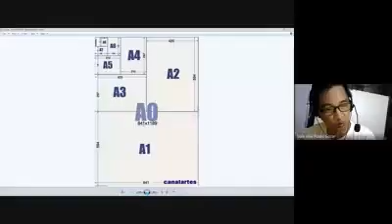Please confirm, can you see my screen? Wala pa po, sir. Nakita na po, sir. Dito na po. Meron na?

Yung A1, A0. These are the sizes of papers. No? Ano na siya? ISO na. When you say ISO, international standard na siya. Before, may mga letter size. What else? Letter size saka yung legal size. Now, yung letter size naging A4 na. Pero yung legal, nandiyan pa rin yung legal size. It's for legal purposes.

And in technical drawings, we have to use this one na. So, ang biggest size of paper, tracing paper, or technical paper is A0. This one usually is for malalaking drawings, yung mga site development plan, lalo na sa civil engineering. Usually, your drawings is ganitong size, A0. In architectural, we also use this size for big projects like mall, big development, mixed-use development. And sa site, when you have a big site, we need A0 size.

Kasi medyo mahal din na magpa-blueprint. Actually, same price din pala. Anyway, iniwasan namin yung maraming sheet of paper, mahirap yun eh. So, A0 is yung biggest size. Ang size niya is 841 by 1189.

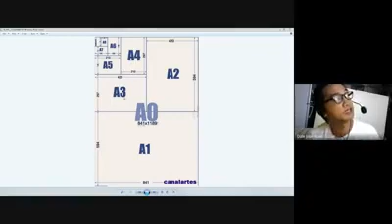Yung A0 is A1. Divide A1 into 2 papers, that will be A2. And divide A2 into 2 papers, that will be A3. And then yung usually we use is A4; 2 times of A4 is A3 na. Okay, guys? So ganun lang.

And then I'll show you yung Philippine building code. Kasi we're doing title block. What is the standard? Philippine standard for title blocks. Siyempre, we need to have a standard to follow. So it's indicated on the Philippine National Building Code. Luma-luma na to, hindi masyado na-update, but still, we have to follow this one.

Mataas yung screen ko eh. Sorry guys. Hirapan din ako. Okay, this is title block. Let's do number 4. Okay, where is the phone? Nandito naman pala. So, it's just the same.

Siyempre, ang gagawin natin today is A1 size lang. Kasi, ito yung normal size talaga for technical drawing. Special na itong A0.

I'll show you yung building code. Where is the building code? National Building Code. NBC. Makita. So wala dito.

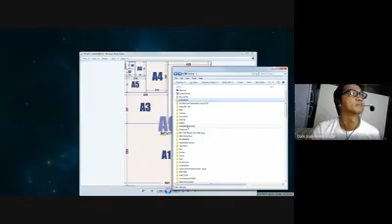Hindi ko makita yung Philippine Building Code. Where is that one? Philippine Building Code. Pasensya na guys, saglit lang ha. Hindi ko makita. Building code. Here, building code. Okay. Ang dami. Philippine Building Code. Ito.

Okay, this one, implementing rules and regulations. This building code, you can download in DPWH, yung latest copy sa DPWH. Just look for the title block, guys. I-upload ko to, or medyo malaki na, yung part ng title block lang, I will upload.

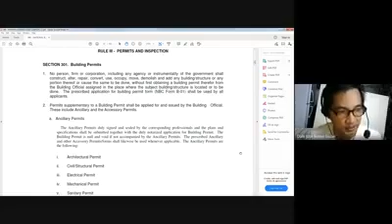So again, we need to have a title block on our drawings, to show your name, syempre, and the project name, location of project, the engineer or architect's name and yung license number niya, and then yung professional tax niya. What else? IAPOA number, and so on. And then yung owner, name ng owner, and then yung project name. Yung address of the owner and address of the project.

It's all indicated there. And then we need to show lahat ng disciplines involved. So if architectural, ang magsasign dito is, of course, architectural. Yung civil, guys, please do not sign on architectural ha. You are actually not allowed. Huwag nang makipagtalo kasi architectural is architectural. Civil is civil.

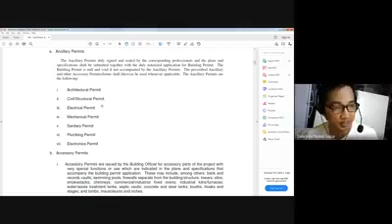Hanapin ko lang yung mga... this one is the title block. Okay, guys? So for the cover page, yung pinakaunang sheet. Say we are building a house or a building. So we need to show the perspective, the site development. This is architectural, no? And then location plan.

So again, ang title block, we will follow this standard, guys. These are the margins. Yung length of paper, depending on the size of paper that we will use. So say we will use 20 by 30 inches, or yung A1 size, we can use that one. But the margins, you should maintain. It is 45 mm or close to 2 inches. And then this here is 1 inch, yung right margin, or yung left side margin is 1.5 inch.

No, 1.5 inch. Then 25 sa right side margin, right hand side paper, 25, 1 inch. And then dito rin sa baba, bottom margin is 25. Can you follow, guys? Clear ba? So this is our activity for today, ano? And then we have 40 for the bar. No, title block. Okay.

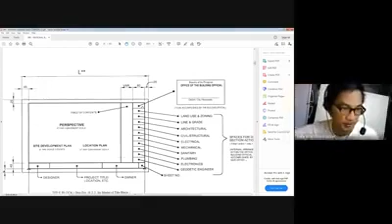And then here on the right side, we also need, this is example for a building project or housing project. Because syempre, there are so many disciplines involved in building project or architectural project. So we need the signature of the building officials sa City Hall, sa munisipyo. Siyempre, we need to get their approval.

One, yung first to sign is yung land use and zoning. So yung building official in charge sa land use and zoning, he will check the plans if may violations. If your building or housing project is not in the right zone. Say yung lot is hindi siya residential zone, commercial or industrial zone. Hindi ka pwede, you cannot build on that area.

Then also we need to check the line and grade. This is referring to geotechnical survey siguro to. Or sa lupa, civil works. Then architectural, building architectural yun City Hall, city architect. He needs to check yung drawings ng architectural.

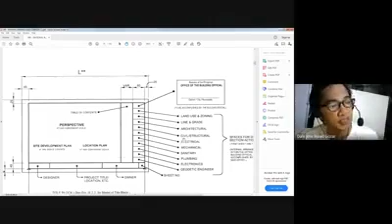And syempre meron din mga city engineers, yung civil structural, civil electrical. Hindi siya involved sa project but they will approve your project sa City Hall. These are the signatories. So you need to put a bar here. And of course, yung logo. Sa taas is yung Republic of the Philippines, Office of the Building Officials, and District, City, and Municipality. Say Quezon City or Manila.

Then here, sheet number. This one will vary depending on the project and depending on how many disciplines involved. Dito magbabago yung laman sa baba. This will vary. Example is yung kanina. Example is, hold on.

Okay, so this is my example again. This is yung sa project ko, my title block is usually like this. So this is my company. This is my architectural firm, yung logo ko. And then this is the engineer, owner. Actually, in this project, this is actually my boss in my office, Chiyoda, Philippines. So yung boss ko is the owner.

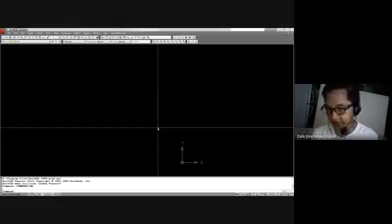Again, during our first meeting, I was able to discuss we have two spaces in AutoCAD, yung working space. Can you now see my AutoCAD, guys? Opo, sir. Okay, kapag ganito, yung default, anong space yun? Usually dito tayo nag-drawing. What is this space? You will have online exam, guys, maybe in midterm or finals. What is this? Kapag ganito ang logo, meron kang X and then meron kang Y.

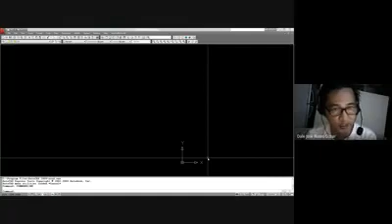Because we need to understand the flow of your work, the concept, since we are designing buildings, we need to know electrical. Actually we have a subject, half a semester, on electrical - we learn how to compute. Then in plumbing, one semester, there's a subject for plumbing. Then in structural, just rough calculations.

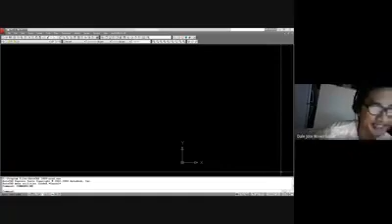Where do we put it? What's the opposite of model space, Ria? Trixie, sorry, Trixie - can somebody answer? Paper space po ba? Paper space. Very good, Roland. At least they're listening. Thank you, I appreciate it.

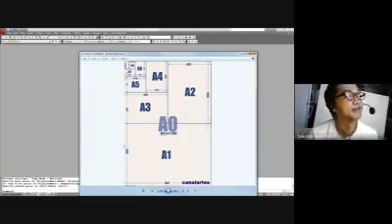Again, what is the size? Can somebody give me the size of A1 paper? Anybody can answer? 841 by 594. Yes, so this is yung X. Tama pagkakasabi niya, sino yun? Ako po, sir. Sino, si Trixie, attentive. Okay, very good Trixie. So again, para gawin to, what is the command?

What command do you use to do the rectangle, di ba, yung you gave me dimensions, ano, that is rectangular. So what is the command? Rectangle po. Rectangle, very good, tama po, sini-check lang kita, ha.

Ang starting point, again? 0,0. Correct po, 0, thank you. Okay, 0, tama siya. Pero again, and then what is the size? Yung other corner is how much? 841 by 594, thank you po.

Guys, tingnan niyo, yung actual size ng paper, yung default size ng paper sa AutoCAD ay maliit. Ito yung A1 size paper. Tanggalin ko muna itong butas, i-erase ko muna, hindi pa naman natin kailangan, different topic yan. Ito kasi yung zoom, yung plotting scale niya, kaya nandito lang siya. I-disregard niyo lang to, this is the paper size. Okay?

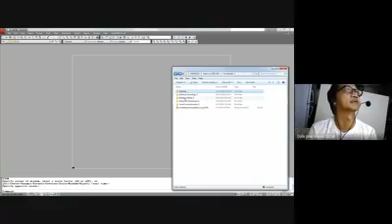What else? And then we check the title block, yung sizes. Building code, where is the building code? Nasaan building code ko? Sinarado ko ata, ito sinarado. Okay, again, this one, ano? Okay, so what is next? So meron na tayong 841 by

594, ano, this one, what is next? Anong command kaya? Siyempre guys, anong next step natin? Anong sa tingin niyo gagawin? Meron na tayo itong line na to, yung outer, sa paper meron na. So what is the next? Offset po. Offset, yes, offset by how much, tama ka, Maritoni. By how much? 45 po. 45, yung sa ano po? One side lang. Ay yun, ano po ba, one side. One side po, oo.

Okay sige, pero we need, yung rectangle kanina, we need to explode. May bagong command kasi iba-iba ang sukat ng margins, ano? Thank you Maritoni, galing. Just checking na sumusunod kayo, ha. Participate, guys, ha.

Okay, so this one, this one is a rectangle, no? So it's a P line, actually siya polyline siya, a rectangle is a polyline, ano, polygon, polygon siya, so usually ano siya, one entity siya. So you need to explode, yun ang command, explode. Tingnan mo to, lilist ko ha, isang entity to, one found, one entity or one object. So we need to explode yung rectangle, explode, select mo lang. So ngayon, four entities na siya, no, 4 lines.

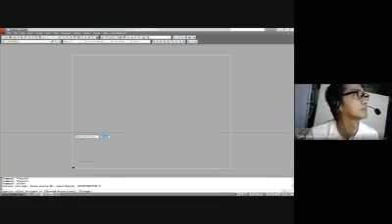No, this one. So now, tama si Maritoni, we can now offset. Ang command ano, offset. Offset by how much, Maritoni? 45, 1.5 inch. 45 mm. Ayun, tama si Maritoni. What else, Maritoni?

How much? Sir, di ko po kita yung screen po na isa, hindi makita. Yung AutoCAD ko? Hindi pa yung pag-base po, yung building code, hindi niyo makita. Opo. Okay, this one, 25. So, 25, so that is 25 na, no? Tama, 25, very good. So, 25.

So anong diperensya nito, guys? Dito, so meron mga extra lines, di ba? Paano mababawas yung extra lines? What command? You have to trim, tama, or pwedeng trim ano, you have 2 options. So trim, tama si, sinunod, Tisha? Tisha ba nagsabi? Tisha, okay, thank you Tisha. So trim, tama si Tisha. Trim, tama? And what else? Anong pang option natin?

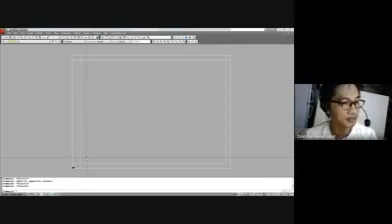Sir, si Trixie po yun. Trixie pala, Trixie? Sorry ha? Okay lang po. Okay, but yung mga guys hindi nagpa-participate, si Otelo lang, yung iba hindi.

Iba na talaga mga babae ngayon, no? Kahit sa Archie, guys, mga babae magagaling. Ba't kayo ganyan? Balik ka na mundo.

So this is fillet. Actually, I prefer fillet, it's faster. In the latest version of AutoCAD, they removed the selection options. It's automatic now, no need to select the border. So there's just a little adjustment from the old version to the latest version.

Tricia, there's background noise. She's not talking, Tricia. Okay, good.

Okay, I'll ask somebody. What's next? We have the borders already. What else? Come on, answer, guys. Offset again, sir, for the title only. Okay, thank you, Roland, that's correct. Offset of how much? Which one? 40. This one? Correct, thank you Roland. Offset 40. Okay, very good.

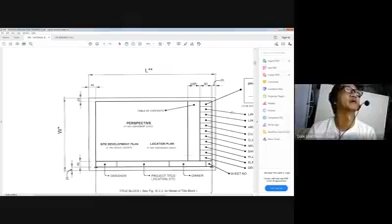Now what else? So in my sample, in the building code, there's no spacing indicated for the others. It's not indicated, the spacing. So I guess we will use... I have one.

Hold on, I'll just look for the file. This one doesn't have complete dimensions. Okay, let's use this one for now. Let's put this, 80. Next is 80.

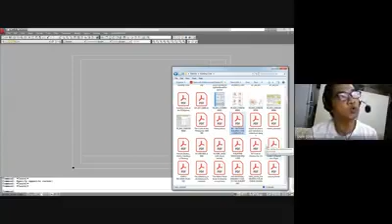There's no measurement for the others, because it will depend on every office, they have their own standard.

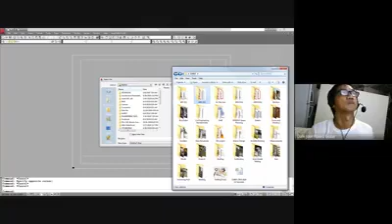Okay, I'll just assume, I'll just make it. Not this one, let's improvise. I can't find the file. This is easy actually, so we copy this one. Say this one, instead of my name, of course we'll put Adamson.

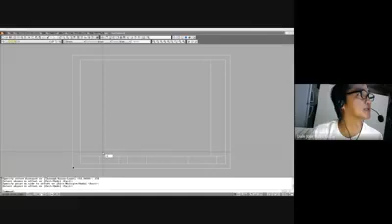Okay, let's insert the Adamson logo. Insert, no, insert picture. Can you see, guys? Here you can insert pictures, or raster image as it's called. So I already downloaded the Adamson logo on my desktop. Here is the Adamson logo.

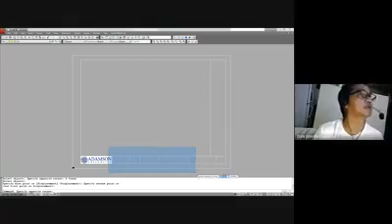So as long as we follow the 40. And then here we have a bar here, 20, say 15. Just 10. Offset 10 here. I'll give you those dimensions later so you won't have a hard time making it.

In your plate, no need to put dimensions, guys. Pero pwede nyo rin gawin just to check, and practice na kayo for dimensioning. Laki pa natin, hindi masyado makita. Dimension style. Text height is 5 siguro.

Okay, then yung tick mark, wala pang tick mark. This one should be 2. Okay, so ito na. Outside. Okay. This should be above, usually above siya. And then text lines is okay na siguro.

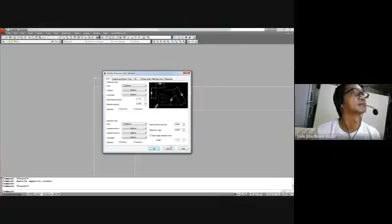Again, yung dimensions will be done separately, not today. Dim vertical. Check lang natin mga dimensions para madali na gawin later on. Vertical. And last. Okay, then this one up to here. Mali ako. Dim horizontal vertical.

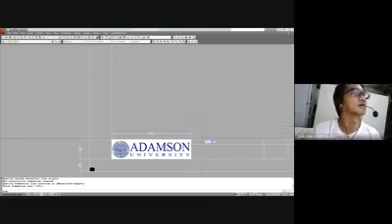Beam horizontal. Okay, sundan na lang muna natin to. Say 165. Horizontal. Here is 150. You can take note na, para hindi na kayo mahirapan sa paggawa. 150 siya.

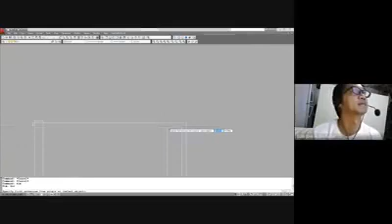Isang beam horizontal. So this one is the sheet number. Wala pa tayo ito. This is 80. Beam horizontal. And this one, yung bar. Dim vertical. 10, I think. Beam continuous. Hindi siya nag-snap.

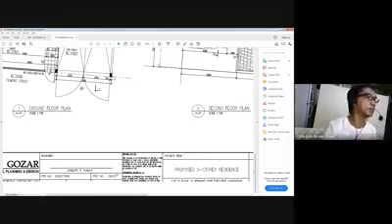So right now, ito muna gagamitin natin dimensions. Hopefully tutugma to dito. What is the next step? Yung text na. We have here engineer. Pwede nyo ilagay engineer, designer or architect, depending on the project or your discipline. If you're drawing electrical, we put electrical engineer here. Then indicated is PTR number, PRC number. Not my number, hindi ko ilalagay muna.

Then yung presidential decree. Can you follow, guys? Any question? Can we start na text? Anong command for the text? Andiyan pa ba kayo, guys? Sir, pwede po patingin po ulit ng mga dimension?

Okay. For now, pwede ito mag-change. Wala namang rule dito. These are my suggestions. But yung sa building code, you must follow those. Yung 40, yung 25, yan yung kailangan natin follow. But the content inside is flexible, you can change. You can use na if you want. Meron pang tanong? Yung hindi specified sa building code, pwede tayo mag-change. Ito 80 is specified, kailangan masunod 80.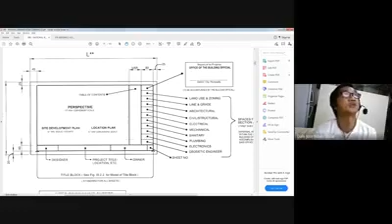Next command, guys. How many disciplines ito? We have line here. How many can we divide? 1 to 11. We need to divide this bar. Anong command to divide? Siyempre, divide. Ang dali ng AutoCAD kasi English yung mga command. Select item to divide, this line. How many segments? 11.

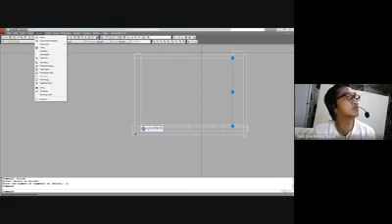So here, nag-divide siya. Actually, hindi dinivide yung mismong line, but naglagay siya ng mga points. Default ng AutoCAD, the points you cannot see. You can change the point style here. Para makita mo, you need to change. Ito maganda para makita kagad. X.

Did you see, guys? Clear ba? Opo, sir. Divide, and then yung point style. You can go to the menu, dito sa format, and then point style. Or you can just point style. Paano pa command nun? Point style. I'm not sure about the command, no? Tingnan natin. P-style. I don't know the command, but you can just press the menu. Point style. Ito. Or you can change, kung gusto mo ito, pwede rin. No, but usually, ito is enough. This is enough for me.

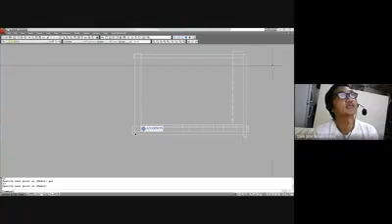And then, since meron na tayong guide kung saan nilalagay, divided na siya evenly, no? Even ang pagkakadivide niya, we can just now put the line. So, saan tayo magpuput ng line? Node. Node is a point. And then perpendicular. Kasi hindi ata naka-snap. Yung snap ko is hindi kasama yung node. Pero kapag sinama natin yung node, automatic na yan. No need to specify. Line. Then, nag-snap na siya, guys. Hindi na ako naglagay ng node. Automatic na. Then perpendicular. Okay, guys? Did you follow?

Kaya minsan, ginagamit rin as insertion point yung mga points, nodes. Then you can just copy na lang to, mga line. Para mas mabilis, simply copy. And then we can erase na the points. No need for the point. After using the point, you can erase kasi hindi naman siya kailangan talaga. It's just a guide. And gumugulo yung drawing kapag may mga points. So you can throw away or delete. Okay, clear. Kompleto na tayo.

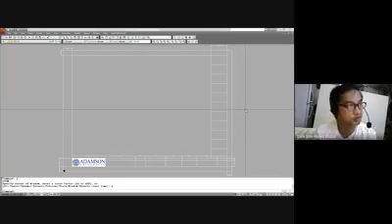Ang kulang na lang is yung text. So what is the command for text? D-text. D and text. So, starting point is here. Then, specify the height. Usually 3. In AutoCAD, usually 3. Kasi mm ang ginagamit natin, pwede 3, or pwede 4 or 5. Kasi alam mo na yung size ng bar is 10. So yung text mo dapat is below 10. So, I choose 3. Tingnan natin kung enough na yung 3.

Rotation is 0. Pwede mo siya i-rotate. Pwede naka-angle yung mga text mo. But this one is 0 lang tayo. So, I'll enter here, architect. Should all capital, guys, kasi technical drawing, we always use capital letters. Architect / engineer, pwede yan. Okay, yun na. So, medyo maliit.

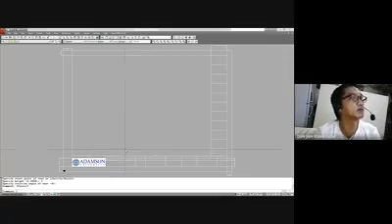And then you have to move this one. Since maliit, kasi 3 lang yung ginamit ko, pwede mo increase. Properties. So you can increase now here, yung height. Gawin natin 5. Okay, follow guys. And you have to fill up all. I'll put, since engineering, engineer. And then we can copy na all the text.

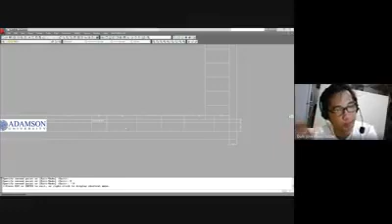Then guys, always use yung insertion point para align lahat ng text natin. Always use insertion point and points. And here in the intersection or perpendicular. Guys, while moving, command ko move, nag-apostrophe P ako para makapag-pan. Apostrophe P. And then I'll just enter. Here. Naka-perpendicular siya. Easy. And then simply edit na lang to. Sheet number.

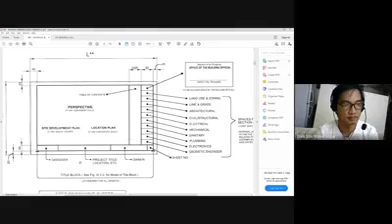Here is revision number. Sheet content. This one is what? What is this one? Here. So this one is architectural. No need to label that one. So this here is a number. Project title and then owner.

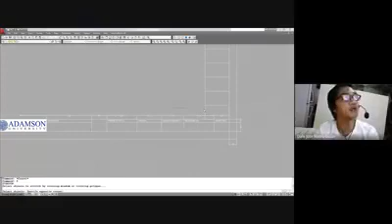Medyo palaki natin ito, i-adjust ko lang. Nag-change ako ng dimension, mas importante ang sheet content. Mas malaki dapat ang sheet content. ST. I'm using stretch. I-adjust ko lang itong isang cell. Stretch by 25. And then, yung owner, dapat malaki din. Masyado malaki yung engineer. Ilan ba ito? 19. Okay na to guys.

So this is the dimensions. Ay kulang pa mga additional dito sa baba. Hold on. Yung address sa baba, mga 10 din siguro. Lagay tayo ng mga address dito. Project title. Ilan ba natira? You can say 15. 7.5.

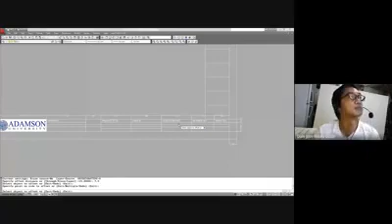Okay, what else? Tingnan natin. Okay, tama, 4 lang. So, dito sa revisions, meron kang nakalagay 3 columns. 3 columns. Sheet content. Dito sheet content, pwedeng wala na siguro. Here, wala, kahit wala na. This one, meron ka dapat columns. 10.

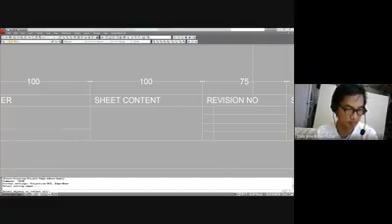Actually, it depends on the project, may mga standards dito. Ayun, nakalagay. Date and description. Number and date and description. Number and date description. 15. Okay. I think we need to increase this one. I'll increase, kasi important ang revision number. And then may description pa siya.

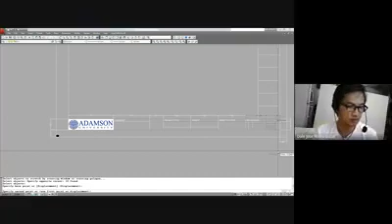I will increase by 20 dapat. Kukuha ko dito ng 20. Stretch, guys, ang command ko stretch, ha. Stretch. I'll offset by, kukuha ko ng 20 sa kabila. And then kukuha ko dito sa kabila ng, masyado malaki. Stretch by 5. Then I'll stretch here by 31. Ganun na lang. So guys, ito na lang. Tama lang to.

And we need to have labels here. Madali lang guys ang title block, medyo marami. So we need to practice this one. You have 1 week naman to do it. Actually, today you can finish this one. Madali lang ito. What are the disciplines?

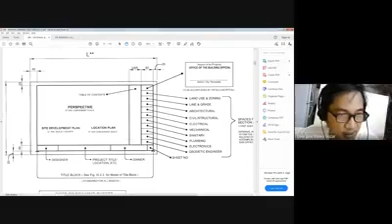Sir, tanong po. Okay. Dictate nyo na lang sa akin. Yes, si Ria. Ria, ano yung tanong mo? Sir, paano po ulit maglagay ng line after ma-change yung point style? Yes, Ria, naririnig kita. Na-change na po yung point style. Ano po ulit after nun? Yung sa pag-divide ng line.

Divide and line. Line command. Then, meron kang insertion point nun. Di ba after dividing, magkakaroon ng mga points. Yes po. Yung points, you cannot see the points. So, you have to change the point style. Nasa menu. I'll show you in AutoCAD. Ito, under format, meron ka ditong point style. Point style, this one. Okay.

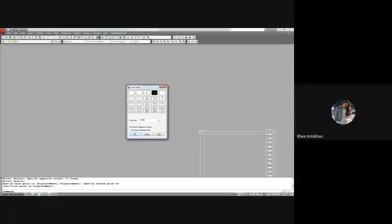Ang default ng AutoCAD is this one. Point talaga. Hindi mo makikita. It's very difficult to see the point. That's why I changed it to, pwede namang ito, o ito. Ngayon, in-erase ko na yung points kasi natapos na ako, nagamit ko na siya. Paano po yung line after po niyan? Node po ba yung next, sir? Yes, yung point is node. Doon ka mag-snap. Snapping ka sa node. I-on mo yun sa OSNAP. OSNAP node. Ito, node.

Tanggalin ko lang kasi nakakagulo lang. Tatlo lang ginagamit ko kasi kapag marami, nakakagulo lang. So, ang favorite ko is yung tatlo. Kasi very seldom you use snapping yung points. Very, very seldom. Yung perpendicular, hindi ko masyado ginagamit. Kaya you have to learn how to use OSNAP. Okay, Ria? Opo, sir. Thank you po. Sino pang gusto magtanong?

Si Otelo, magaling to si Otelo. Cool na cool, hindi nagtatanong. Kapag hindi na nagtatanong, ang gagaling na siguro. Sir, ako po. Okay, Paolo Castro. Sige po.

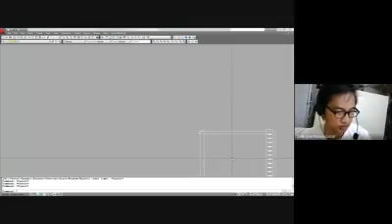Sir, paano po mag-add ng text? Na-disconnect po kasi ako kanina. Okay, ang command is dtext. D-text. Yung font, no need to change muna, yung default na lang. Okay po, sir. Ito na, dtext. Then, after entering dtext, ang tanong ng AutoCAD is yung insertion point. So, you need to specify yung insertion point. Say dito.

Then, yung height. Kanina nag-assume ako 3. Pinalaki ko ng 5. 3, depende sa drawing mo. But usually sa mga text sa dimensions, it's 3 lang. Dito parang malaki pa, dapat 3 lang talaga. We can change back na lang. Masyado malaki yung 5.

Tanggalin ko mga lines. Properties. Ito, you can change the height of the text sa properties. Just change here. Height should be 3 lang dapat. Ganyan. Move na lang natin. Move previous.

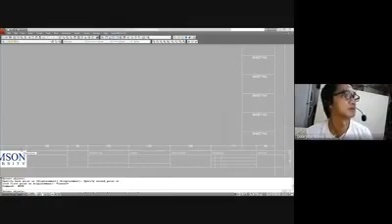Okay, so yung iba, lagyan natin text. Number, CP. Guys, yung edit is DDE or DDEDIT. Pwedeng ED lang. Edit yung laman is ED or DDE. So, this one is number. CP, copy lang. Kapag meron ka na, copy mo na lang.

Date here and description. Or pwede mo i-double click. If you want to edit, just double click on the text. Ang daming ways ng AutoCAD. Kaya mabilis talaga. And this one is description. Okay, yun.

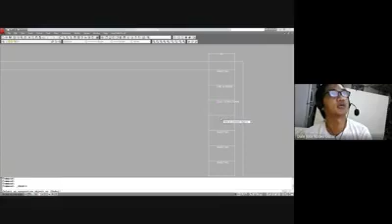Okay, so this one line and grade, architectural, civil, okay. Kabisado ko na. Okay. Pwede naman iba-iba eh. CP. This one should be architectural yung una. Yung una yung dapat. This one is architectural. And sanitary. Tama ba? Electrical, mechanical, sanitary.

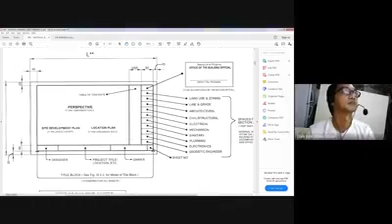Plumbing. What else? Electronics and geodetic engineer. Okay, yun na lang. Electronic and geodetic engineer. May geodetic dito sa class, di ba? So, again, lahat kayo magagamit to. Electronics and geodetic. Wrong spelling pa ako. Geodetic. Complete na ba? Geodetic engineer. Pwede na yan.

And then, siyempre yung sa taas. Republic of the Philippines, Office of the Building Official. Okay, here. Saka natin palitin, Republic of the Philippines, Office of the Building Official.

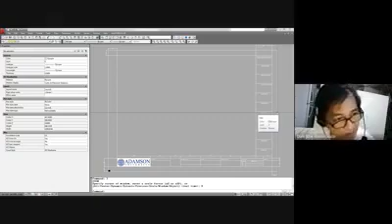So, any more questions guys? I think it's all complete na. It's very easy lang guys. It's marami lang, but it's a good exercise, and it's very important. The title block is always important. And I want you to save yung ginawa yung title block. We will use this one in other drawings. I will teach you how to plot yung pen assignments. And then composition: merong large scale, 1:100, merong 1:5 detail. I will teach you all the actual practice, yung ginagawa talaga sa reality. Ito is actual. You will use these things.

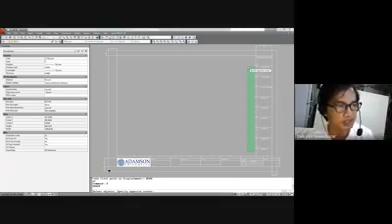And what else? Here, guys, I want you to put your picture. I'll insert my picture now. Here you put your name, say, Engineer Ria Antulihaw, or future engineer if you don't want engineer. Then I want your best picture here. Again, how to insert a picture is this one here: raster image.

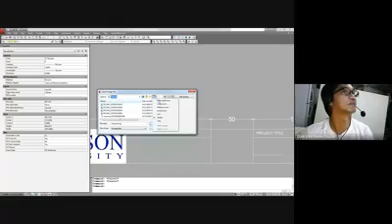Then I'll try to find a picture of mine. I don't know if there's one. Is there a picture of me here? I don't know where the picture is. Wait, where is it? This is my dog, a picture of my dog. And the other one is my wife.

So that's it, guys. Trim it, then you can adjust this line. It went past the margin, so we can make this one smaller. There. And the line here, we can just move it, or you can stretch this one. Like that, it got bigger. Anyway, you get my point.

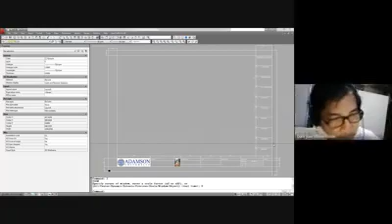Okay, I think it's done now. You put your name. The project title isn't needed since we don't have any project title, and no owner either. I want your name, picture and Adamson logo. That's all for the title block requirements. Then this one I can erase.